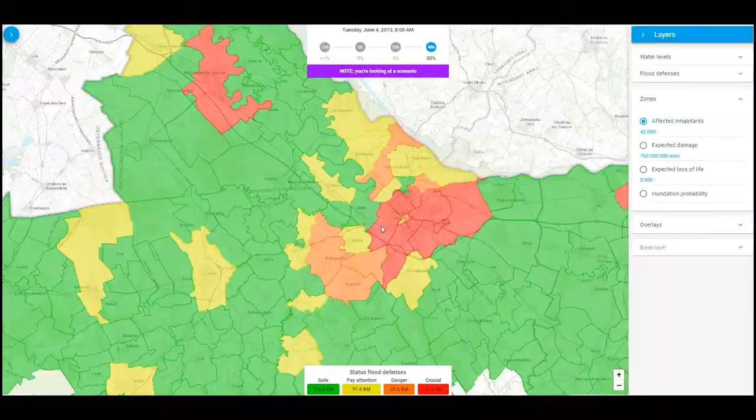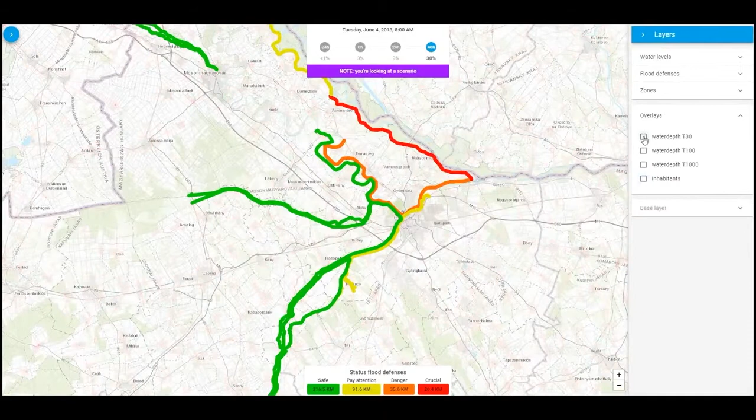The real-time flood risk is based on real-time or forecasted weather events and water levels, conditional flood probabilities given a certain water level, and flood consequences. This innovation of HKV is called Continuous Insight and is being implemented in the Netherlands. Please contact us for more information.

Thank you very much, HKV Services.

So, Piet Hein, is this something you don't have to buy? But I'm curious, is that triggering something? It certainly triggers something. I think it's a very useful tool.

We are very much promoting discussions between water authorities and, for instance, municipalities to carry out stress tests, and on the basis of the outcome of these stress tests, to have risk dialogues so that you can really pinpoint where you need to take measures with the highest priority. There are several tools that I know of, and this seems to fit excellently in the suite of tools.

Yeah, so Bas, you see this as well? You've already met them, I guess. Yeah. So what's so practical about this?

I think particularly in many parts of Europe, we all have to make European flood risk maps from the European Flood Directive. In the Netherlands, we have a lot of information already at hand, but in many countries I think this is a great tool to use the information and make the flood risk maps that they often do not have yet. I did a project in Romania long ago, and we were building these flood maps over a period of a year. I think with this tool, it can go in a matter of days.

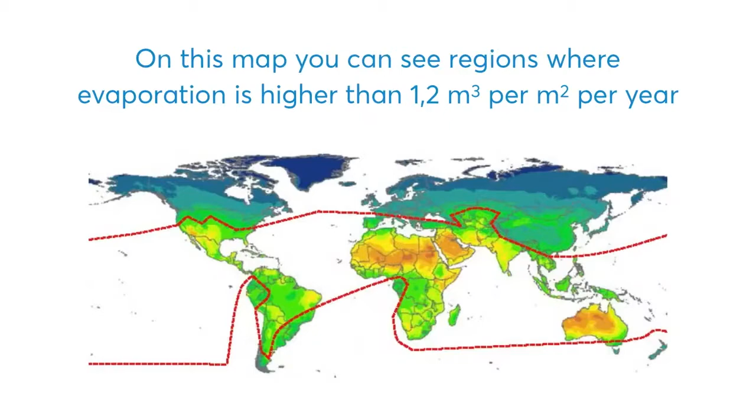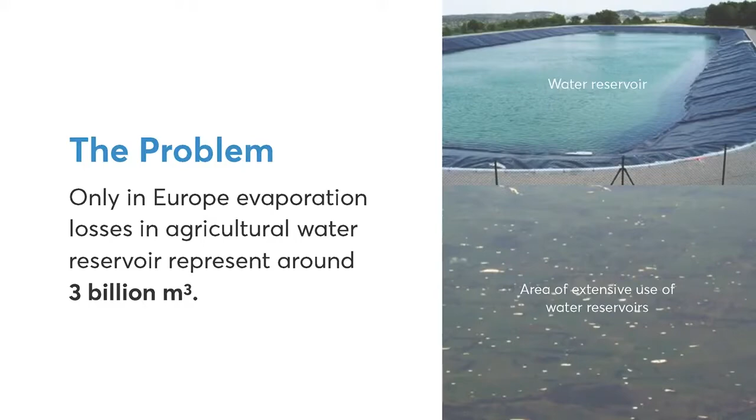Here we can see an example of a water reservoir and an aerial picture of an agricultural region, plenty of them. Only in Europe, evaporation losses in agricultural water reservoirs represent around 3 billion cubic meters of water. As an example, the aridest region in Europe, southeastern Spain and its river basin, has average losses of water in reservoirs of 1.4 cubic meters per square meter per year. This loss is equivalent to 20% of urban needs.

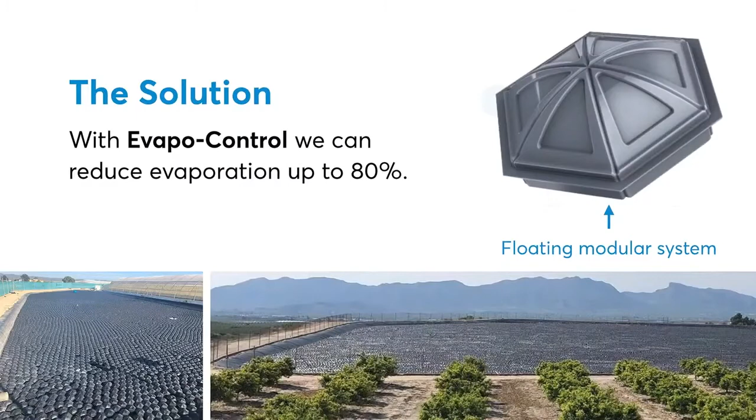With Evapo-Control, we can reduce this evaporation by up to 80%. Evapo-Control is the result of a complete rethinking of all modular floating systems, from production process to materials and design, looking for lower weight and lower production cost.

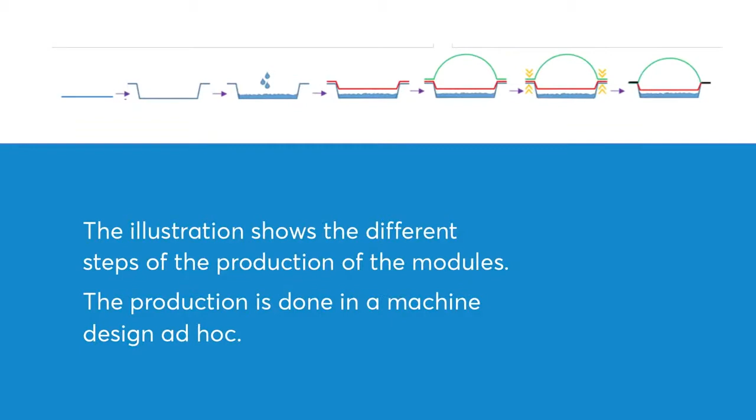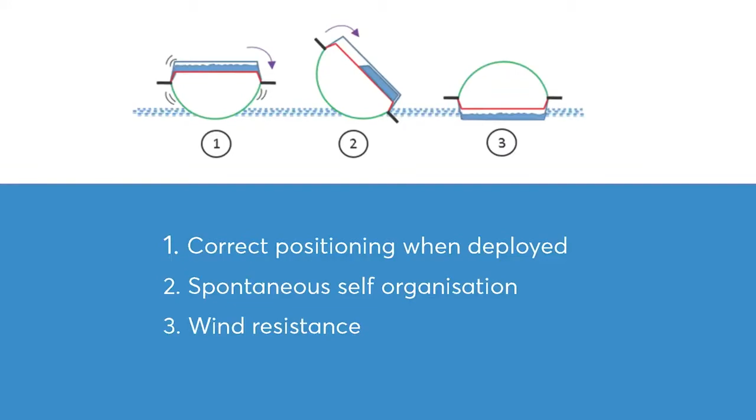In the drawing, the different steps of the production of the modules. The production is done in a machine designed ad hoc. Thanks to its design with 2 chambers, one of them ballast, we have 3 advantages: correct positioning when deployed, and spontaneous self-organization and wind resistance. In the following videos, you will see how the modules behave.

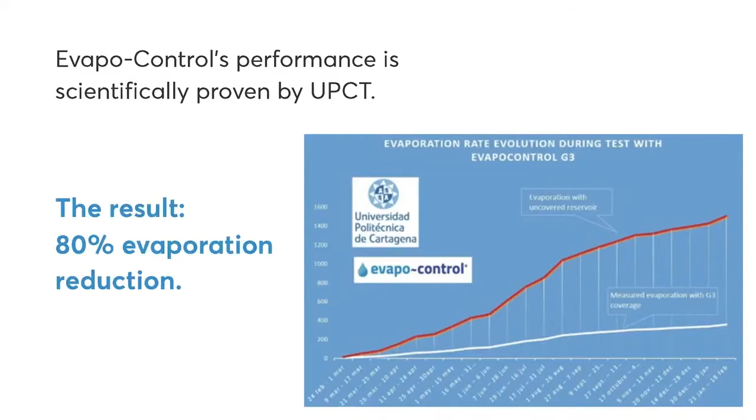Evapocontrol has been scientifically proven together with the Polytechnic University of Cartagena. The result has been 80% evaporation reduction. As sunlight is diminished, algae growth is controlled. Here you can see 2 ways of deployment.

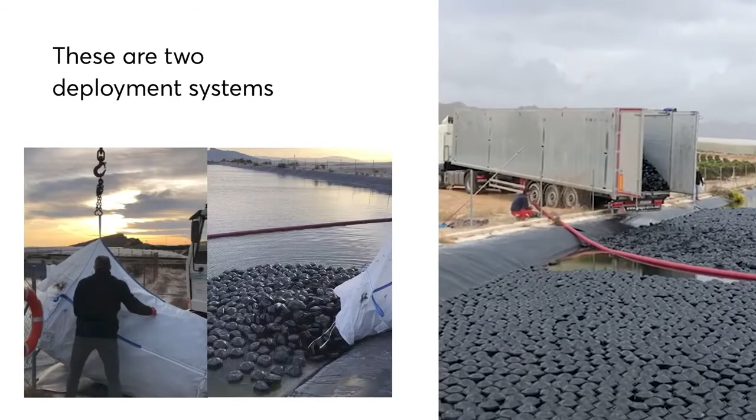Here you can see a reservoir already covered with Evapocontrol. We are a team of 5 engineers with 25 years of experience in industrial, civil and hydraulic projects, as well as in the transformation of plastic for agriculture.

That was Evapocontrol. Wow, it's boss. Sometimes I think, well, this is such an easy solution, why doesn't it exist already. But it's not an easy solution, I guess. There's a lot of invention and thinking behind it. And what's nice, and what I also heard from their team, is that BRIGAID helped them develop their marketing and economic aspects, the business aspects, with the tools that we gave. And what we also did in the project with these innovations and others, is we supported field tests financially where they could improve their product.

And I think in Delfland, this is another record drought here in the Netherlands. We're going to need these type of things soon. I don't know if you can have one, but is evaporation a problem in Delfland or not? Today it's close to 30 degrees Celsius. Yeah, so I know for sure that today we are pumping 4 cubic meters per second into our system. Wow. Also to combat the evaporation. Right, yeah. Oh well, it's pretty nice.

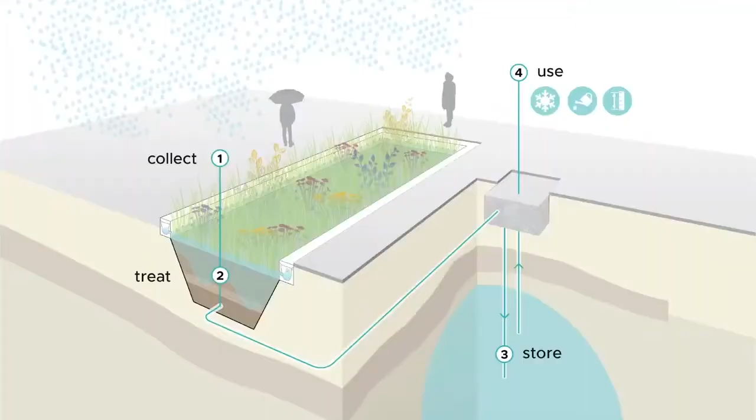Let's have a look. Hi, my name is Karina Peña, I am the CEO of the Dutch startup Field Factors. We have developed a solution to tackle heat and drought, and also too much rainwater in urban areas, making cities climate resilient. Bluebloqs is a circular system that enables rainwater storage and makes it available for reuse in dry periods, for irrigation, to fill ponds, or for children to play in on dry summer days. Bluebloqs is nature-based and adds to the spatial quality by adding green and improving biodiversity.

With the help of BRIGAID, we were able to test our technology before implementing the first full-scale pilot in 2018. With the business development support, we drafted our business plan, which has had a big influence on our company growth, and also visibility. The showcase on the Climate Innovation Window brought us in contact with Adaptation in Belgium, with whom we are now collaborating to test our technology in Flanders.

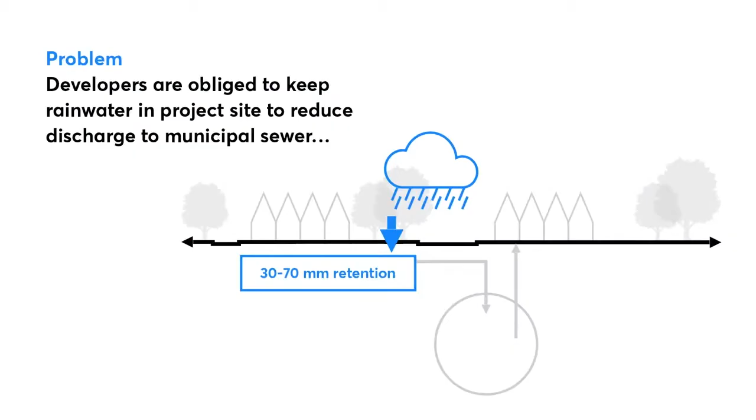Flooding due to intense rainfall, as well as water shortage during long periods of drought, are the largest challenges we are facing, damaging our planet and costing us a lot of money. With the growing urban population, freshwater availability is under pressure. At Field Factors, we have a solution. Bluebloqs is a nature-based system for rainwater storage and reuse in urban areas, making cities green, cooler, and climate resilient. So how does it work?

With Bluebloqs, we collect and retain rainwater locally. With our biofilter, we ensure it achieves the right quality to be stored underground in the natural aquifers, from where it can be recovered for reuse.

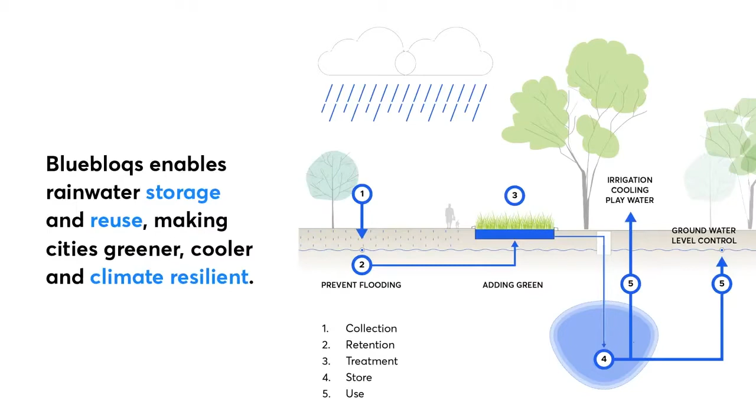Field Factors is a passionate team of designers, engineers, and storytellers who are changing the way we deal with water in the city. With our unique products and services, we help our customers implement circular water systems in urban development and retrofitting projects, from design to delivery and operation of our systems. We work together with municipalities, water utilities, project developers, and sport clubs, making cities greener, cooler, and climate resilient.

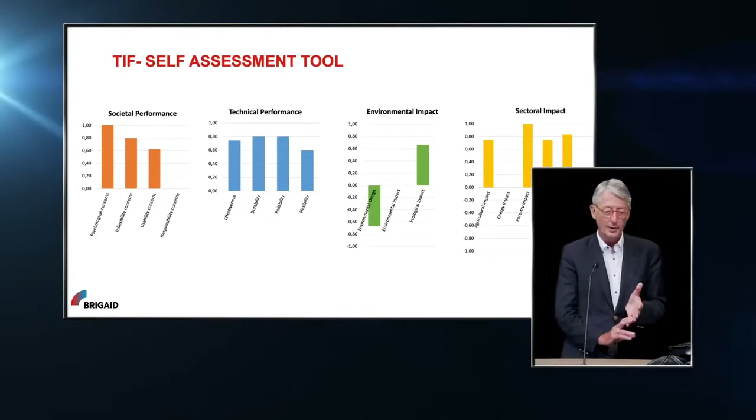Technical questions aside, a very important second component is the societal acceptance of any innovation. In some cases, the public just doesn't like it. You can sometimes easily identify what creates a risk in that field, and you can eliminate that risk if you apply the so-called TIF self-assessment tool. That's our product, and we are very proud of it.

But this is a huge problem - what kind of solutions does the audience not like? Do you have examples? Yes. If you come forward with a very high-tech innovation, like a temporary flood barrier, in an area where people don't believe it will work, they will just not accept it, and then it will not work either. But if they participate in the development, training, and testing of how to apply it, and feel it's their own, then it will work.

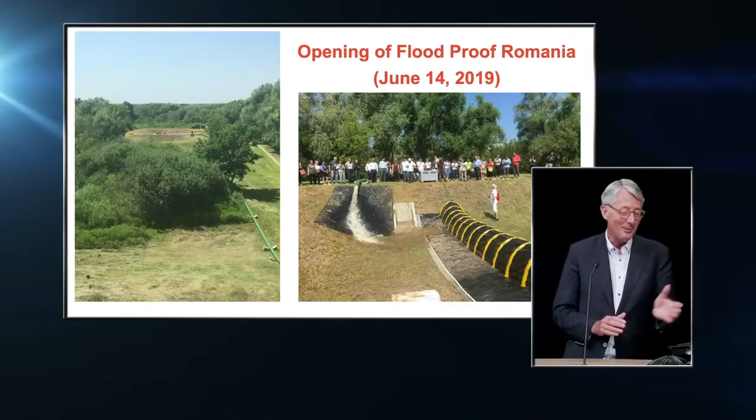There's one person who's really very sure of his case, standing right here - the developer of the tube barrier. He is having one of his happy moments.

We have prepared a video giving an overview of the facility - it's a drone. Let's show the clip of the drone, and you can talk over that video.

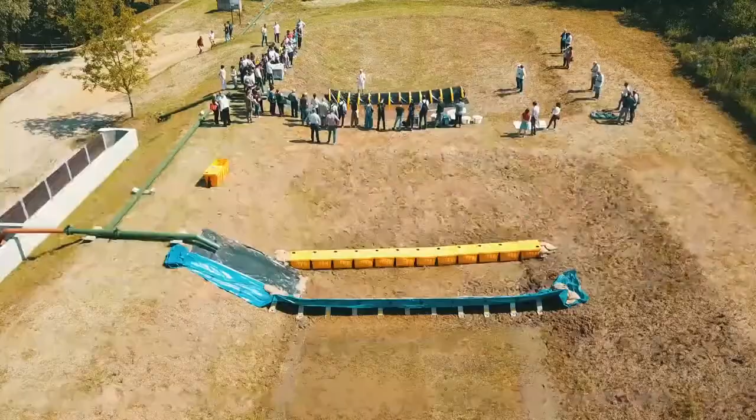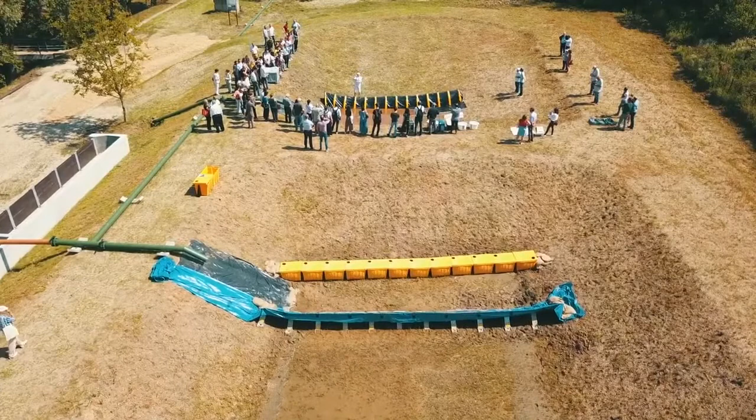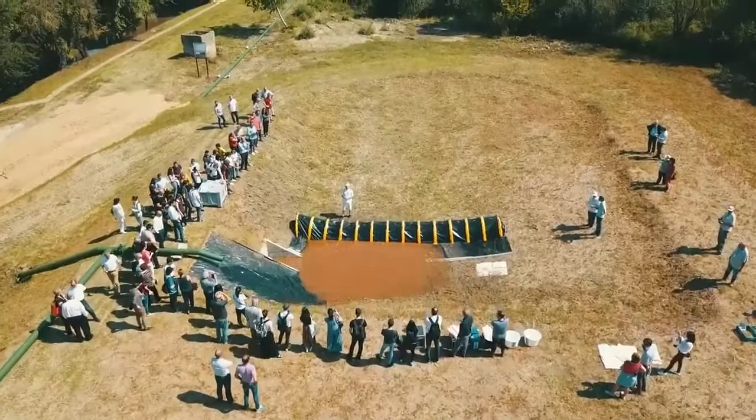On the picture you saw the opening of the water coming in from the reservoir. In the drone flying over, you see how the facility is located in the landscape, and on the horizon you see the reservoir where the water comes from, providing the hydraulic head for these experiments, which can be done during both a static situation and with dynamic pressure.

So this is a Dutch invention, now going to Romania? Or is it not a Dutch invention? It's a Dutch concept to have an operational facility, but this is typically a Romanian situation and a Romanian design that has been implemented. Okay, I think we better ask Adrian Portonici to explain how this happened.

So Adrian Portonici is on the phone - he's a project manager with ANAR, the Romanian Waters National Administration. Adrian, welcome to the show. Hello, how are you doing? Yes, we are hearing you, but do you hear us? Yes, okay. It's a little bit quiet, the sound is not that loud, but hopefully that will work out.

So, I saw a picture of Delft with the inflatable tube barrier, and yours in Romania - how does that differ?

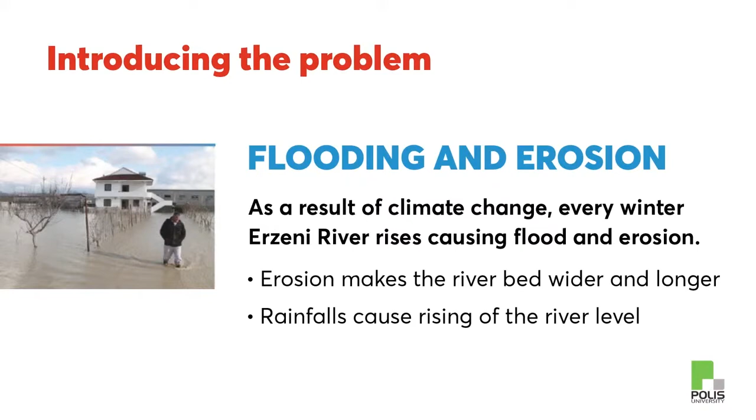One of the innovations selected from the BRIGAID project is flood planting at Erzeni River, presented by Polis University in Tirana. Erzeni is an operational site with floods and erosion problems, so the scope of the innovators was to find a solution to this case. The innovation presented by the research team of Polis University consists of installing 3 or 4 layers of coir logs at the bottom of the river, then planting 3 floors of local vegetation. The aim of this innovation is to prevent flooding by planting techniques that are environmentally friendly.

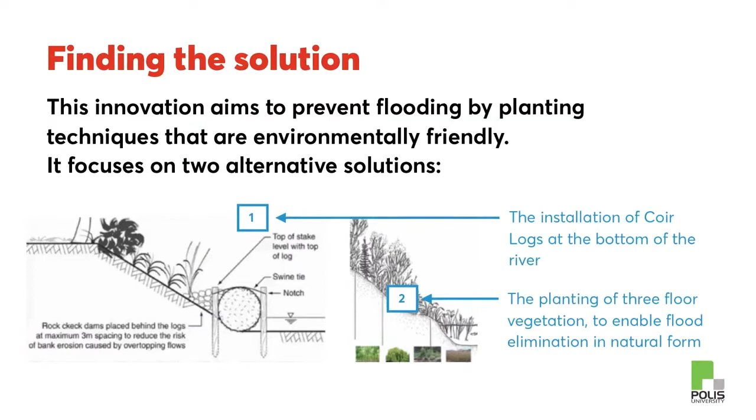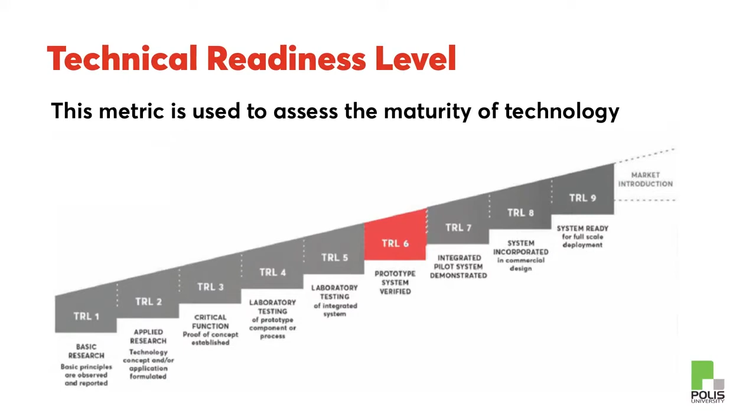The technical readiness level of this innovation is 6. The innovation is tested in 3 river-based sites in Erzeni River. We would like to thank Polis University and their team of professors and students for carrying out amazing work regarding this testing, and also for joining the BRIGAID project.

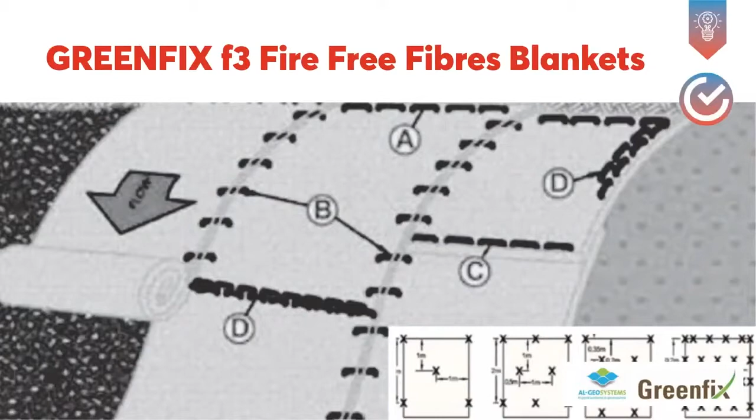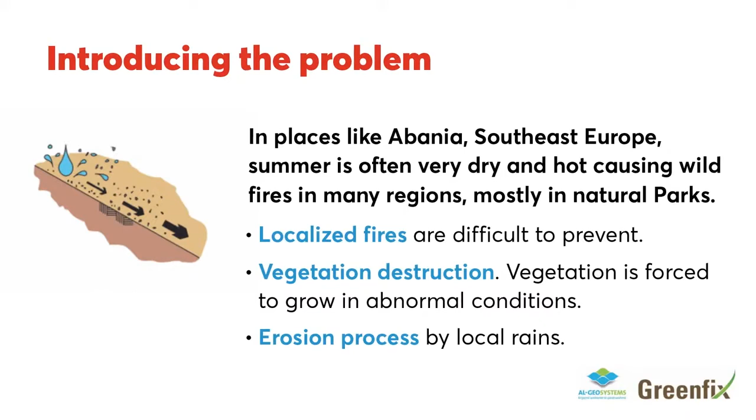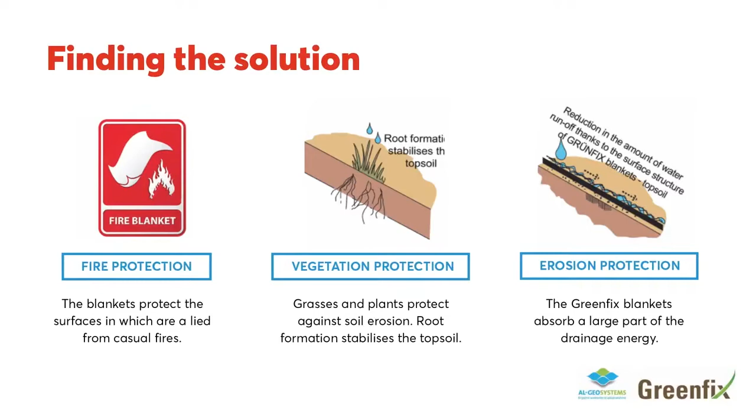The second innovation supported by BRIGAID for the testing phase is Greenfix fire blankets, presented by AL-Geosystems Company. This product is implemented in the Grand Park next to the artificial lake of Tirana, covering a recreation area for children and the newly constructed pedestrian and bicycle lanes. The problem at this site was the damage from casual fires, vegetation loss, and controlling erosion on the steep slopes. The innovators proposed covering the problematic areas with fire blankets to protect the area from casual fires or other extreme weather events, and also to help healthier vegetation growth and control erosion.

The technical readiness level of this innovation is 7. All the areas covered in the Grand Park of Tirana, as an operational test site, are now protected from external conditions.

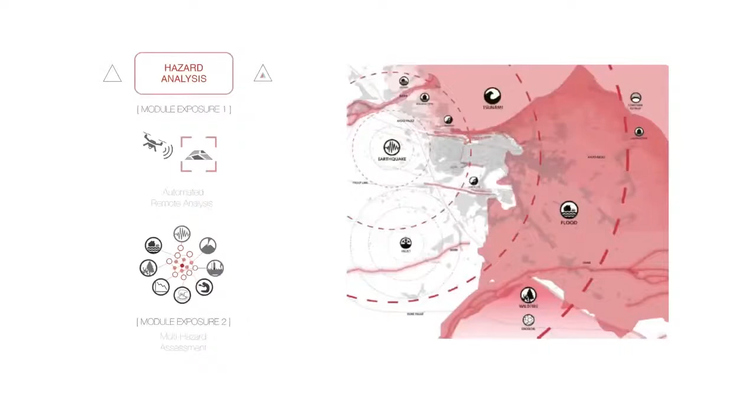Hi, I'm André Schwarz, CEO of Delta Consideration, by profession an urban designer working on integrated urban development projects. The idea of Delta Consideration started in 2013, together with our partners of the Earthquake Damage Analysis Center of Bauhaus University Weimar and Seismotech. We analyzed the impacts of natural hazards on urban transformation. During this research, we developed and tested a transferable tool for urban risk analysis. Delta Consideration combines engineering methods and urban planning approaches to support cities at risk towards resilient development. During the last year, BRIGAID helped me think of my idea as a sustainable product. Cities are mankind's most valuable artifacts, and natural hazards threaten their sustainable development.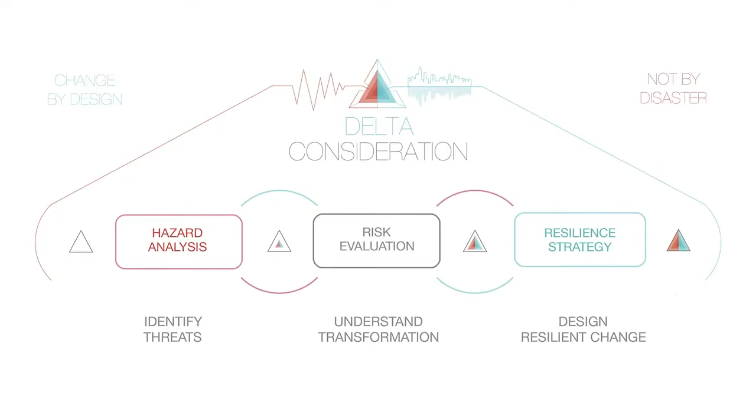Disasters occur as a result of lacking resilient capacities, and common approaches lead to recurring disasters. This means that change happens by disaster and not by design. Cities need comprehensive solutions to effectively reduce disaster risks, by identifying and foreseeing the impacts of natural hazards, understanding the risk dynamics that derive from urban transformation processes, and designing a coherent resilience strategy. In a few words, for long-term sustainable development, cities need the capacity to change by design, not by disaster. Our mission therefore is more than reducing losses and increasing safety. Delta Consideration offers a three-phase module-based service to support cities at risk towards resilient development, pre- and post-disaster. Our main customers are cities in need of urban resilience, as well as international organizations operating in risk areas.

That was Andre Schwartz, and I have him on Skype right now. Andre, good to see you. Where are you calling from? Actually, at the moment from the Baltic Sea. All right, where I have a nice view now. Is it hot there? Because we are at like 30 degrees right now. Yeah, it's the same, but it's nice and windy.

So you have a nice tagline: change by design, not by disaster. It sticks in my head, so that's good. So what do cities need to change? This line actually means that they need a proactive strategy, so what kind of change do we want to create is the question. To analyze this, we created the tool of Delta Consideration. We have to understand how the change has to happen and where this will come from.

What are the risks? We analyzed a large variety of historical and recent reconstruction processes, because we think disasters can lead to reconstruction, and this is also kind of a window of opportunity, because we can better implement change. So analyzing these reconstruction processes, we saw that what cities need is to understand the risk dynamics, what has changed before and after the disaster, and which vulnerabilities result from this change of the city before and after the disaster, to use it to build a resilient strategy.

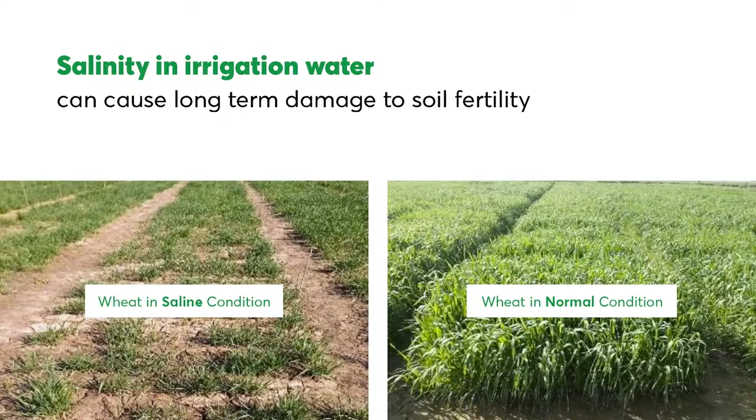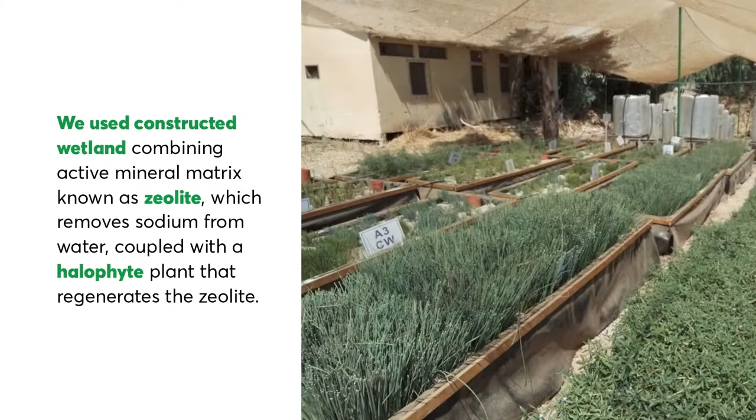Hi, my name is Ezra, and I'm a researcher at the Galilee Research Institute in Israel. Salinity in irrigation water, or more specifically a high ratio of sodium to other ions, can cause long-term damage to soil fertility. Removal of sodium from irrigation water by desalination is costly and complicated. We used a tailored constructed wetland combining an active mineral matrix known as zeolite, which removes sodium from water, coupled with a halophyte plant that regenerates the zeolite.

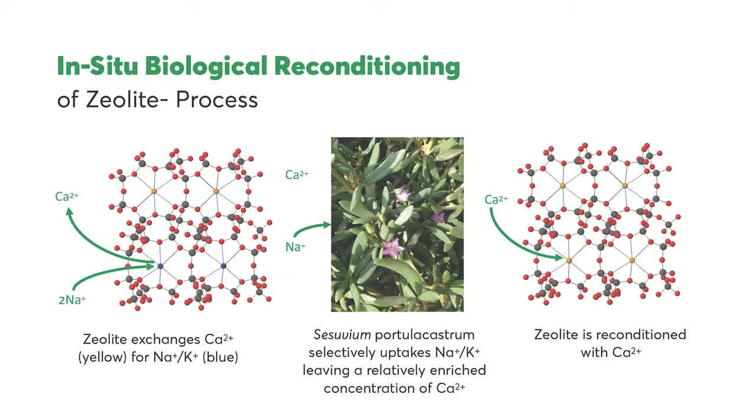The combination of these two components makes the system sustainable and regenerable. When water containing sodium moves through the wetlands, it is replaced by calcium and magnesium, which are good for soil, and over time the zeolite is reset by the halophyte plant. This system is useful for anywhere that irrigation water is affected by salinity, such as at the outlet of agro-industrial effluent treatment facilities, before the effluent mixes with other water bodies.

Well, interesting, very professional presentation as well. So, is this really taking off? Do you know that? In Israel, it's taking off, but also there, of course, the water quality issues, especially with salt water, and the availability of water is a major issue.

Yeah, if you talk about dryness. But also in the Netherlands, again, we have a record drought here. We still have a water system where we flush most of the fresh water towards the sea. I think we're now starting to think, okay, we need things in agriculture and greenhouses to reuse our water, and these types of solutions can lead the way.

So we have to send this one to Pieter Davenfeld as well, because he's going to need that in Delfland. All right. Well, we already talked about that.

Climate change leads to more extreme weather, and urban areas experience more floods, heavy rainfalls, etc. So get rid of those sidewalk tiles in your garden. At the same time, the water that's running off is often contaminated.

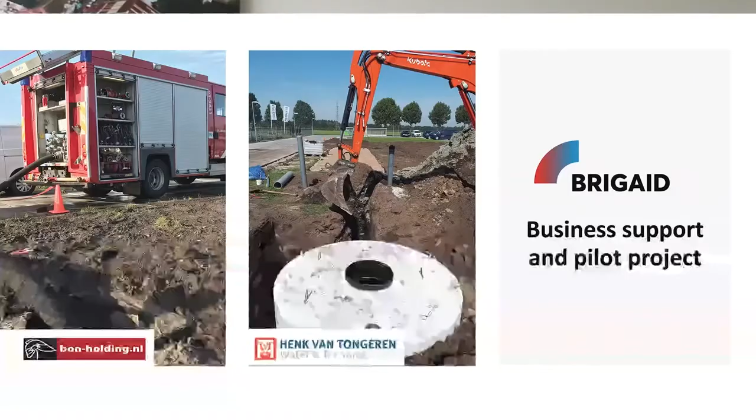BRIGAID supported us to further shape our business model and to realize a pilot project. Climate change not only causes heavy rainfall, damaging public and private infrastructure, it also causes longer periods of drought that put pressure on our sweet water resources, our agricultural production, nature, and our economy as a whole.

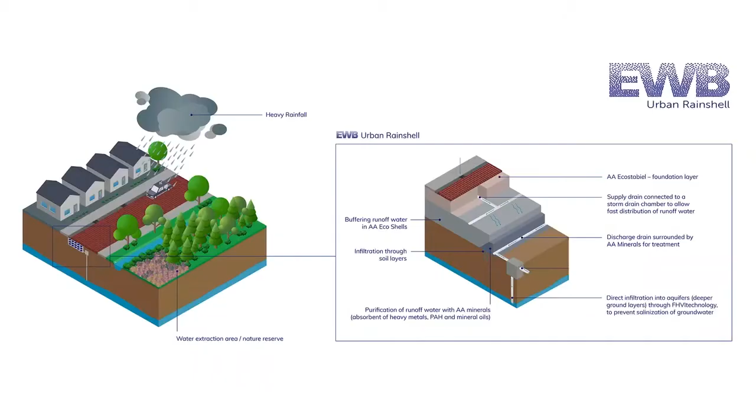Instead of temporary buffering and discharging stormwater as fast as possible to our rivers and our seas, with our Urban Rain Shell we store and use this precious rainwater as much as possible.

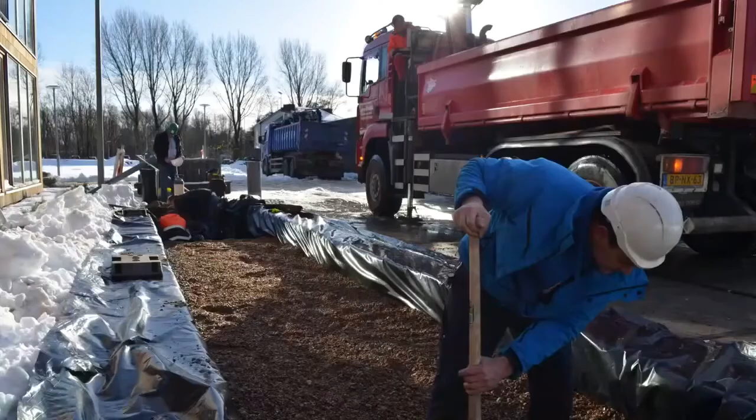It is a patented system that stores stormwater in an underground bed of seashells, a renewable, lightweight natural material with 70% buffering capacity and an infiltration speed of 1300 meters per day.

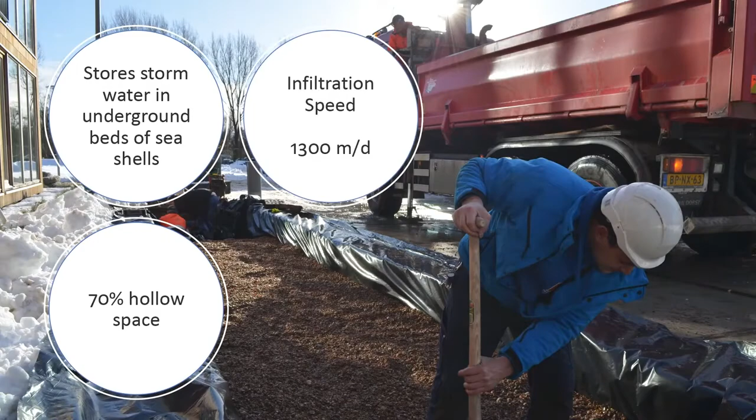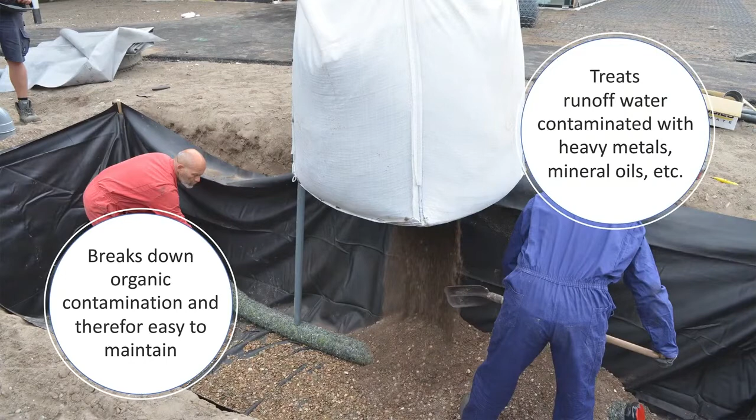The system breaks down organic contamination and therefore doesn't clog and is easy and cheap to maintain. Using an innovative mix of recycled minerals, contaminations such as heavy metals and mineral oils are also removed.

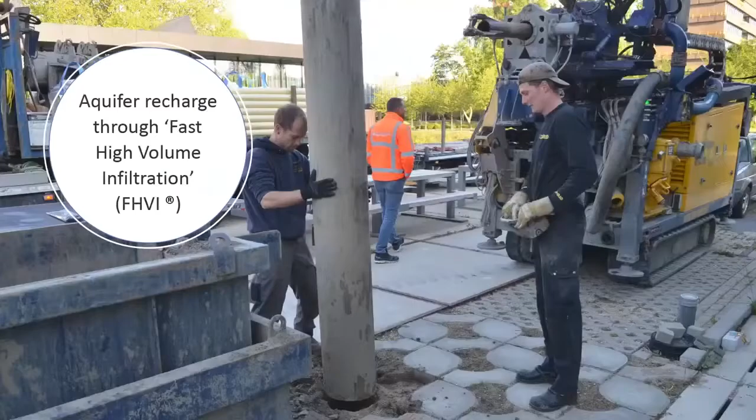With the Urban Rain Shell, we make rainwater available for reuse. As an additional step, the patented fast high-volume infiltration system is used to recharge aquifers, where it remains available for longer periods of drought. EWB is a partnership between Aqua Aurora and Trazenova Sport.

Aqua Aurora is a company with over 40 years of experience in ground, road and hydraulic engineering and water treatment. Trazenova Sport is a construction company that can install a system and assembles our mixtures for the water storage and treatment.

With this team, we are available to support our clients with a tailor-made design, supply the required raw materials for buffering and treatment, and construct the system or provide construction supervision to ensure proper installation according to our principles.

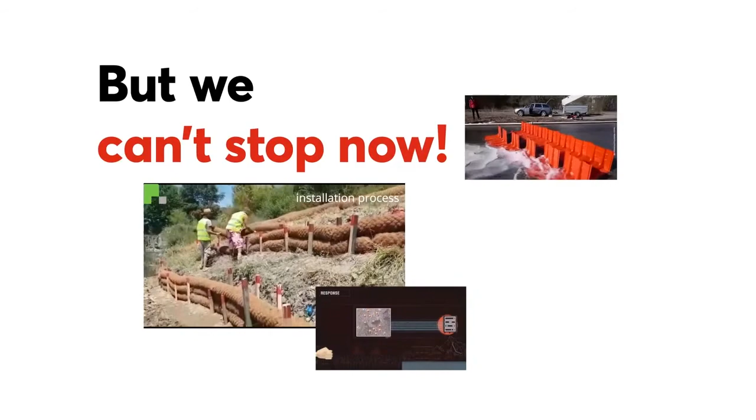But we can't stop now. We now need to consolidate what BRIGAID achieved and turn it into a thriving Europe-wide ecosystem for climate adaptation innovations. Because if we want to create this new climate-resilient world, we need innovators to transform their ideas into innovations of real value to society. That is why we have evolved into BRIGAID Connect to keep supporting the innovators developing real solutions to help Europe adapt to climate change and natural disasters.

BRIGAID Connect's team of multidisciplinary experts provide validated innovator support tools and a Europe-wide network, offering a one-stop shop to help climate adaptation innovations reach the market and improve our lives.

At BRIGAID Connect, we provide concrete help to innovators by finding funding, experts, and test facilities to improve their new climate adaptation innovations. We are also providing business strategy training over web-based tools, and we're offering communication and marketing support to help innovators grow their business.

And because we believe that networking and visibility are the key to sustainable impact, we host communities of innovation where diverse groups collaborate to turn climate adaptation problems into opportunities for positive change.

It's time to make our societies more resilient. It's time to support our innovators. BRIGAID Connect, Innovation for Resilience.